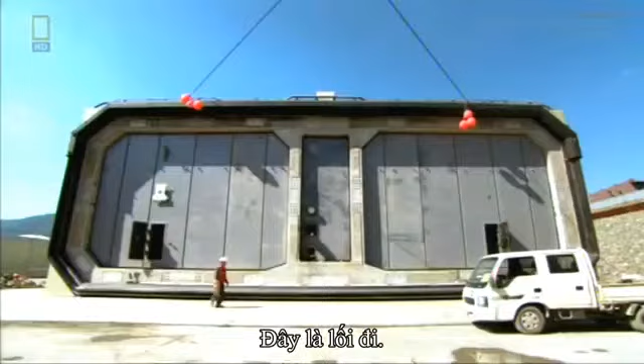Your next vacation may be spent in a paradise you've never heard of. You'll just need a way to get there. Here's the catch. That way has to go underwater. It would become the deepest immersed highway on Earth. Oh, they also have to build a couple of bridges. And did we mention the typhoons?

These tugs are towing a contradiction. A tunnel segment that's both colossal and fragile. Come back, close. Slow down. A raft of techno breakthroughs and untested results. Bound for a place few know, to entice the world to visit. And even sway the choice for the Olympic Games.

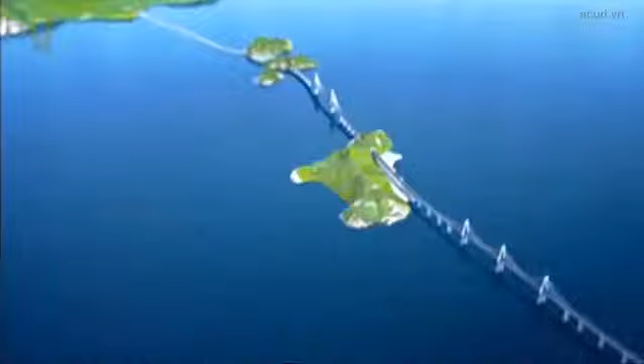The solution will slash travel time from nearly half a workday to 40 minutes and revolutionize life on both sides of the bay: the Busan-Geoje Fixed Link. A 4-lane highway that runs nearly 50 meters beneath the sea. Then it leaps across 2 colossal cable-stayed bridges. Altogether, longer than 80 football pitches. One of the biggest infrastructure projects in the world.

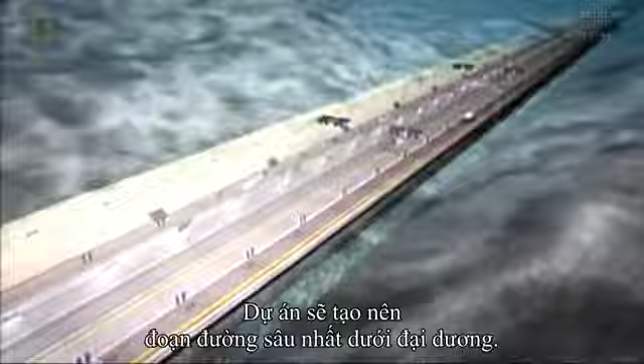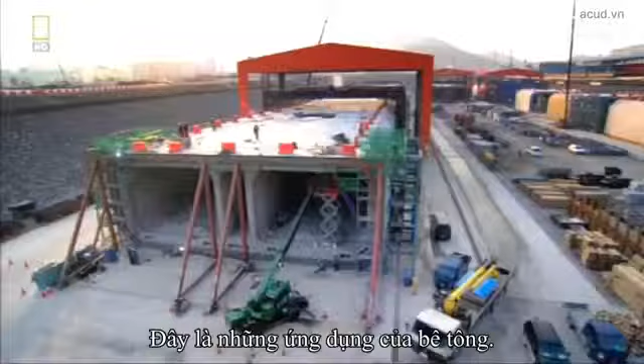Plunging 48 meters below sea level, the link will boast the deepest immersed roadway in the world. The tunnel will be composed of 18 mammoth segments, each as long as 2 football pitches and as heavy as an aircraft carrier. Wide enough to carry 2 lanes of traffic each way, with an access tunnel between. That's the concrete reality. Now, here's where it gets dicey.

Each segment has to be carefully towed into position, then carefully sunk to the seabed. And all the segments have to align within 35 millimeters, less than a thumb's width. Weather adds its own demands. This site is exposed to the open sea. There are always high waves, and the water is deep as well.

It is wide open to the Northwest Pacific Ocean, so we have extreme exposure conditions for the construction period. So we've got to be ready for whatever that sends us, like big swell waves, strong winds, and even occasional typhoon. Building a tunnel like none ever seen will take techniques like none ever tried. Yet the Koreans have never built an immersed tunnel. But this country has.

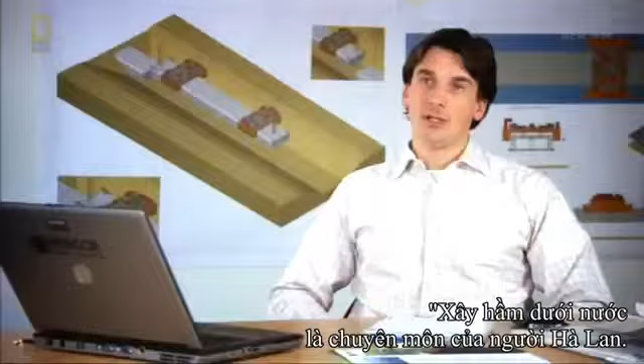The Dutch have 5 centuries of experience at holding back the sea. Het afzinken van tunnels? Tunnel immersion is actually a Dutch speciality. If you look at the number of immersed tunnels in the world, most of them are in the Netherlands.

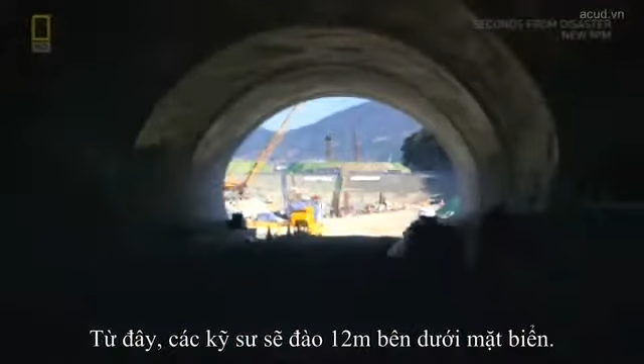Construction begins with the tunnel entrances. One on Gadeok Island, the other near an uninhabited island. From here, engineers will dig down to 12 meters below sea level to meet up with the undersea tunnel segments. But they won't tunnel through the seabed itself. If they did, the gradient would be too steep for driving. Instead, Peter's crew will lay prefabricated tunnel segments on the seabed.

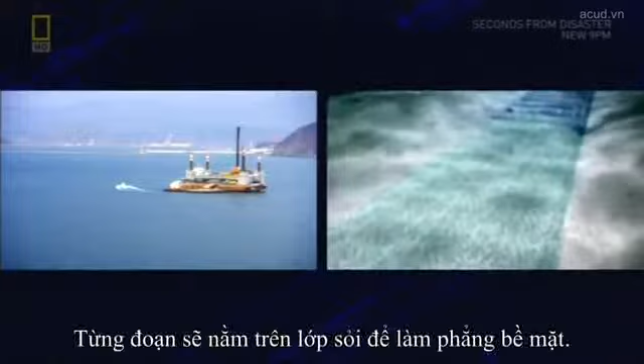First, engineers dredge a trench where the tunnel will rest. To buttress the foundation, they bore concrete columns into the seabed, stopping 3 meters shy of bedrock. The reason? Earthquakes. Avoiding bedrock will give the tunnel crucial flexibility. The segments will rest on a bed of gravel to ensure an even surface.

Because the bed determines the exact height of each tunnel segment, the gravel must be placed with pinpoint accuracy. Later, the entire tunnel will be covered with thousands of tons of crushed rocks to protect it from collisions with ships or anchors.

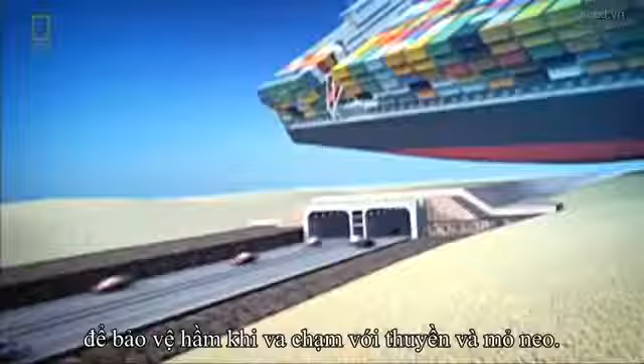Because the tunnel segments will be prefabricated, the first challenge is finding land for a construction yard. Not an easy task in Busan. If you look around, there's not a single metre of flat land anywhere that a contractor can use as a base for the construction period. From the tunnel site, the closest spot lies 35 kilometres away. It's big enough to build up to 5 tunnel segments at a time.

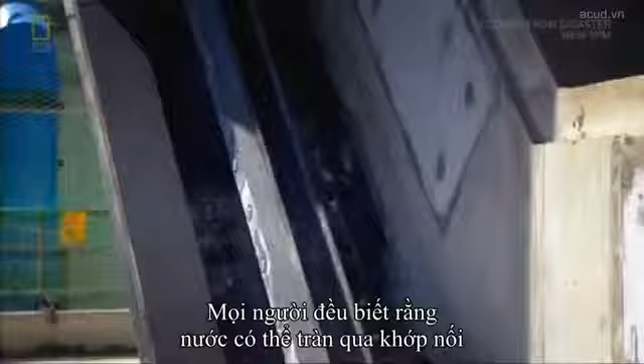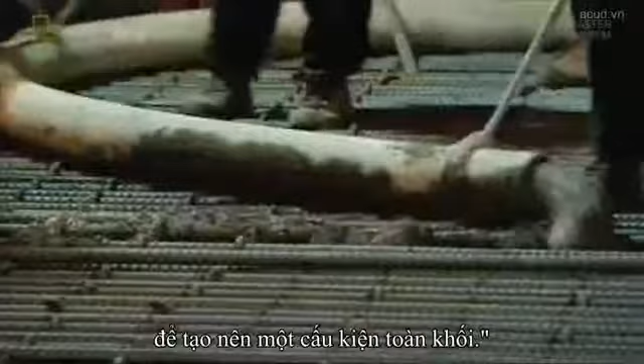Each segment weighs about 48,000 tonnes and is made of 8 subsections, each twice as long as a London bus. Anyone with a basement knows water can penetrate concrete joints, potentially disastrous in an underwater tunnel. But each giant section is cast without a single joint, thanks to Korean ingenuity. We continuously poured full sections from the ground up to the top of the walls to eliminate gaps in the walls. A process lasting 24 hours.

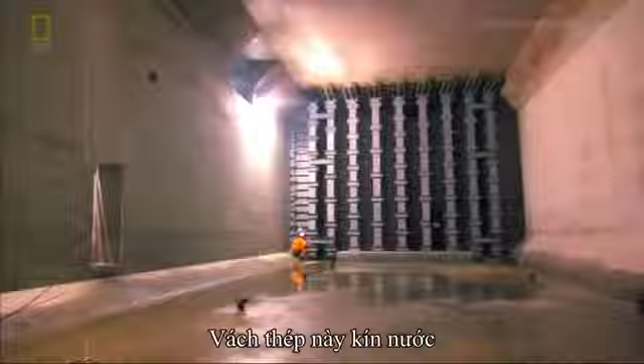After casting, the ends are sealed with steel bulkheads, a Dutch innovation best appreciated later on the bottom of Jinhae Bay. The bulkheads are watertight because these babies are about to take a bath. Flooding the dry dock will allow them to float the segments out to sea. The inundation of the dock takes approximately 48 hours.

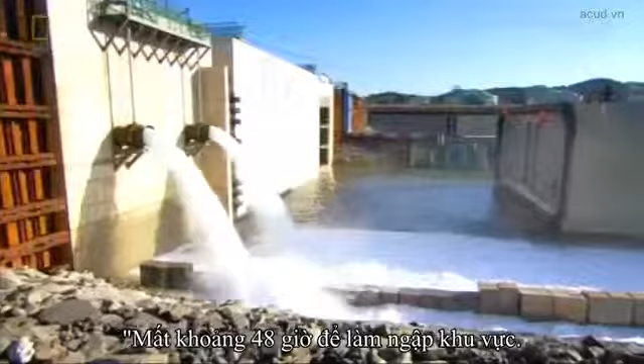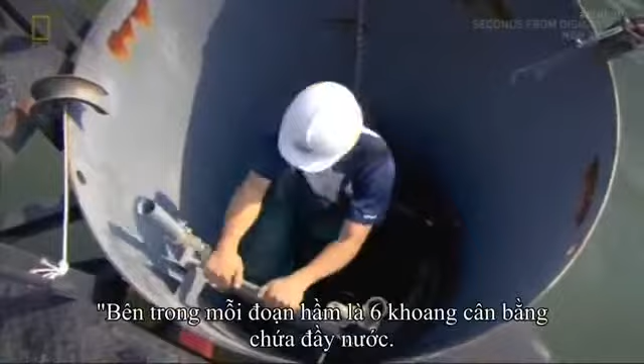During the first phase, we let in water until it reaches the level of the bulkhead door. Then we'll check to see if the bulkheads are leaking. Once all the leaks are repaired, or if there are no leaks, we'll fill up the dock completely. It's enough water to fill 230 Olympic pools. So how do you prep 48,000 tons of dead weight to float? Inside every tunnel segment, there are 6 ballast tanks, and they're filled with water.

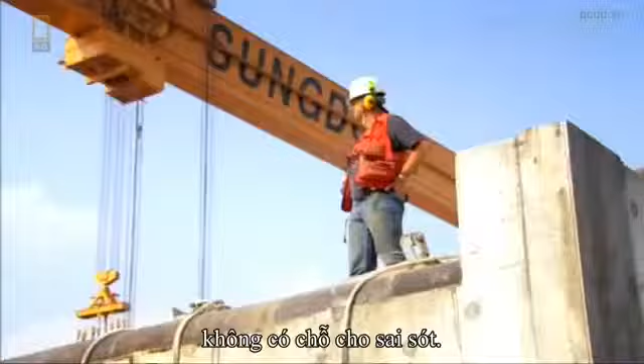Believe it or not, clearing the dry dock was the easy part. While work continues on the undersea tunnel, the rest of the Busan-Geoje fixed link starts to rise. 2 giant bridges. One with 3 pylons, the other with 2.

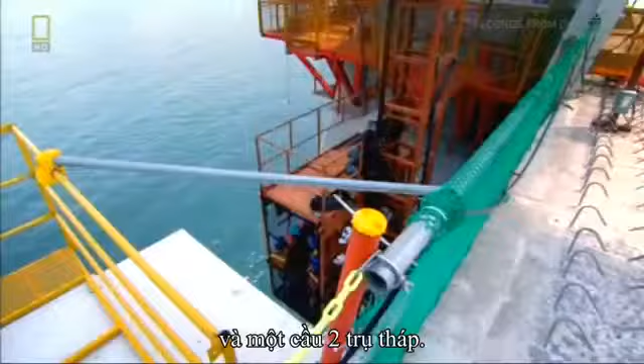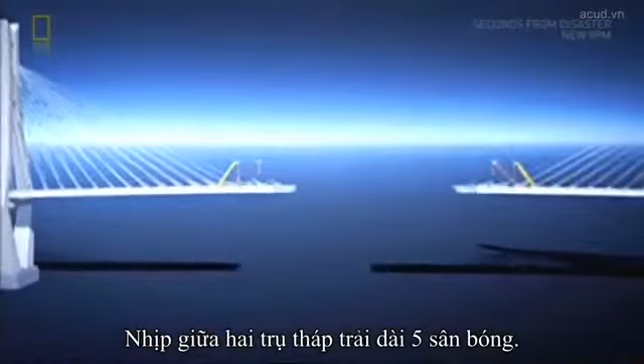At its topmost, the 2-pylon bridge will soar 156 meters above sea level, the height of a 50-story building. The span between the pylons will stretch the length of 5 football pitches, with enough room for the tallest freighters to pass under. Crucial for a city that thrives on shipping for its livelihood.

The most pleasing aspect of the bridge is also the most daunting. Its curved diamond shape. Of course, curved pylons are very difficult to construct, but they're very much in harmony with the surrounding scenery in many ways, in that they bear resemblance to a mother's praying hands and to the wings of seagulls.

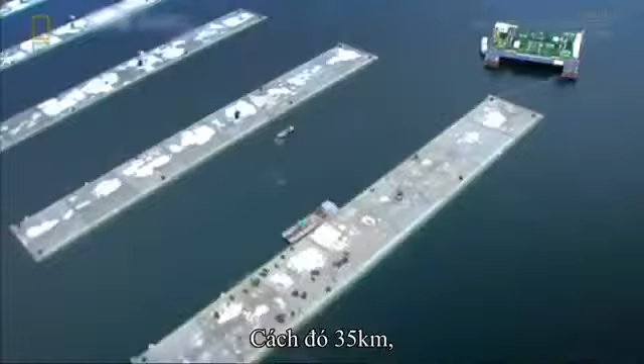35 kilometers away, the first 5 tunnel segments arrive at a temporary mooring site. From here, they'll travel across Jinhae Bay to their resting place on the sea floor, already leveled and lined with gravel. And here's how they'll get there. Pontoons the size of a mansion. Dutch designed, Korean made. One pontoon is positioned near each end of the tunnel segment. After arrival at the tunnel site, mammoth winches on pontoons will lower the segment to the seabed. At least, that's the theory, because it's never been done in the open sea.

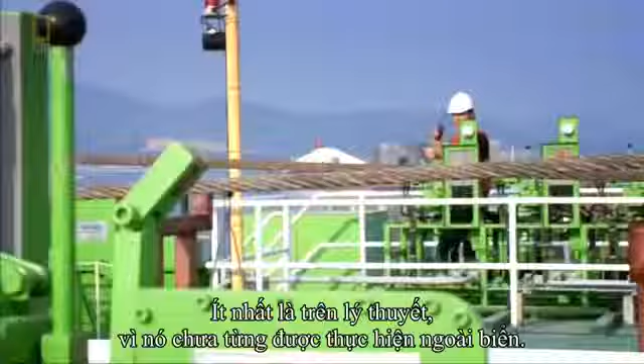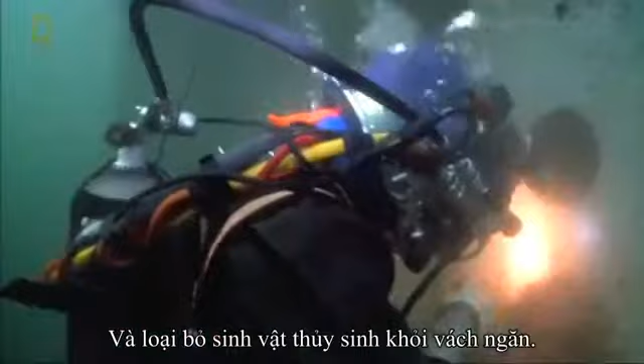A specialist diving team prepares the first tunnel segment for the immersion operation. Divers test connections for data systems and power supplies. Standing by. And remove marine growth from the bulkhead. Down on the wire, please, Steve. Down on the wire. Finally, they install steel wires underneath the tunnel segment, crucial for positioning during immersion. In a good position now, we can come up on the wire. Coming up on the wire.

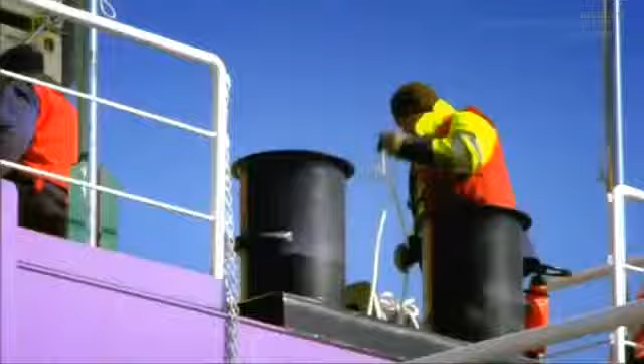Above water, the crew are also adding a temporary access tower, so workers can enter the segment in case of trouble with the ballast tanks. Over, the tunnel is clear. Every problem has to be anticipated, because if things go south, they won't get a second chance. What we do doesn't have anything to do with luck. We know what's involved, we know how the process works, and we have the feeling we control the whole process. Not quite.

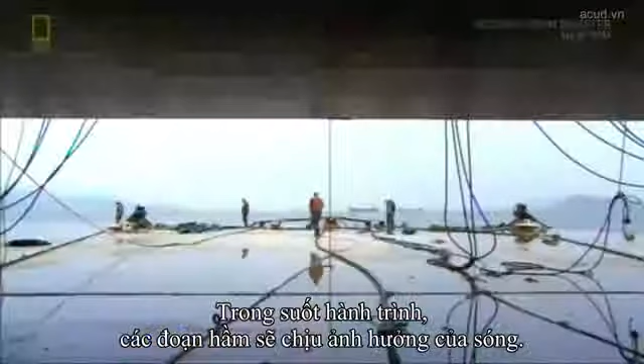Back in Holland, the rest of the immersion team stands by to fly out. In all, 56 men wait for Peter to say go, and he's waiting for a forecast. When the wind blows from the south, swells roll in from the Pacific. Because we're situated offshore, we have to deal with waves. And these waves can be pretty fierce. Even swells barely 30 centimeters high pack so much force they could fracture the subsections that form the tunnel segment. Throughout its journey, the segment will be at the mercy of the waves, so the team needs 3 days of calm seas.

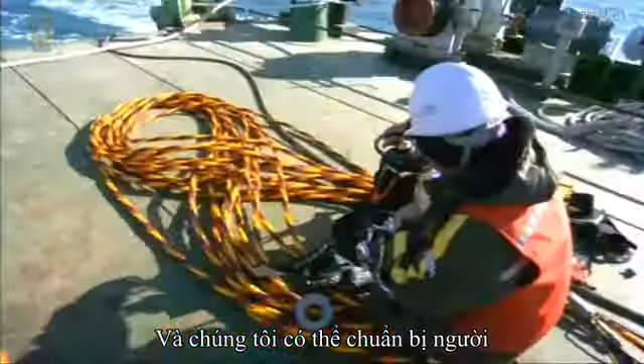Strukton looked around for a forecaster, but few dared to stick out their neck for such a costly guess. Then, a Danish company seized the challenge. They came up with a model to predict waves as small as 10 centimeters, up to 5 days out. A stunning breakthrough in forecasting. That means we're able to say, tomorrow we can do an immersion. And that means we're able to put people on the plane yesterday, really on a last-minute basis. It takes away a big risk for us and for our client.

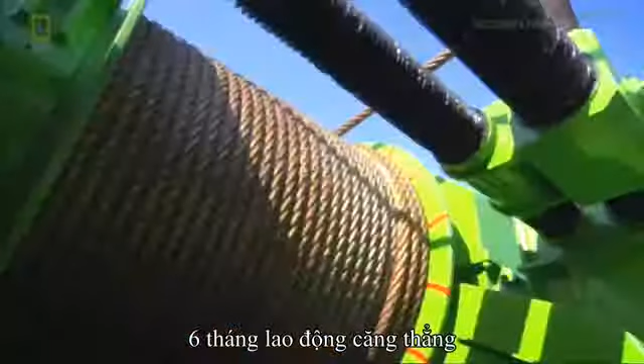We've got the weather. They're all showing the same prediction. The swell still not as bad. I would say we have a go. Green light. We'll try. No more try, right? Okay, thank you. Yes, bye-bye. Ahead lie 48 hours of tension for the boss. Six months of work rides on steel threads and a forecaster's guess. Tonight, no one will sleep soundly.

After a cautious voyage at 3 kilometers an hour, the first tunnel segment arrives at Gadeok Island, the starting point of the tunnel. Joining Peter is the elite team fresh from Holland, among the few men on the planet who can do this job.

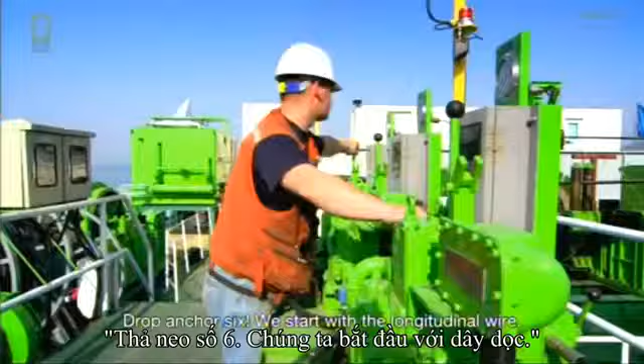But working along shore poses a huge challenge. 48,000 tons have to be maneuvered into a slot with just 1 meter of clearance underwater on each side. One false move and the segment could get jammed in the rocks. Controlling the segment are 14 steel cables, anchored in the rocks and on the seabed. Aligning the segment takes painstaking accuracy. Surveyors take readings using a system of prisms and mirrors mounted on the access shaft and the survey tower. It's all new to the Koreans, so it takes time getting used to the technology.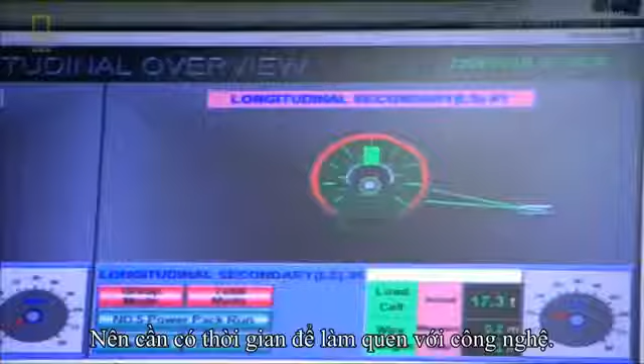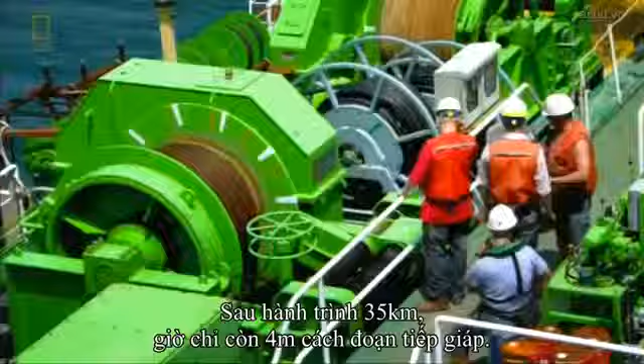The ordeal will take all day and end either with an engineering triumph or a 48,000-ton disaster. With so little clearance and so much at stake, the segment moves at a snail's pace. After a journey of 35 kilometers, it's now just 4 meters from the abutment.

We've worked really hard for a half a year to prepare for this moment. 56 of our people are here to execute this operation. The Koreans are excited and tense because they've never witnessed this. We've done it more often, but still, a very special moment.

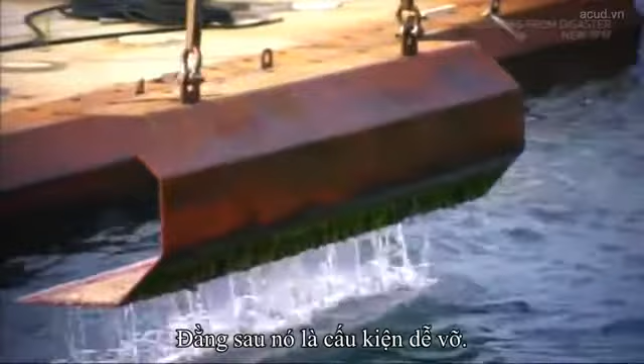Till now, steel plates have protected the leading edge of the segment. Easy down. Behind them is a component as crucial as it is fragile: a rubber gasket to ensure a watertight connection with the abutment. Now they're ready to begin the descent. Operated by remote control, the ballast tanks slowly fill. The command post monitors everything via remote control cameras, on the pontoons and inside the tunnel segment.

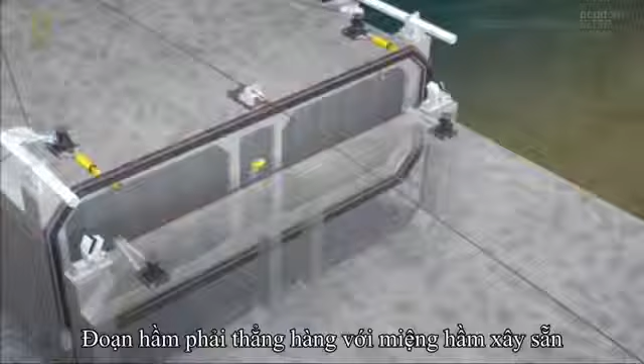The segment must align with the mouth of the tunnel to within 3.5 centimeters. You can imagine that if this segment were placed 10 centimeters off and you did that 18 times, you'd end up 2 meters off on the other side. Well, that wouldn't be very good.

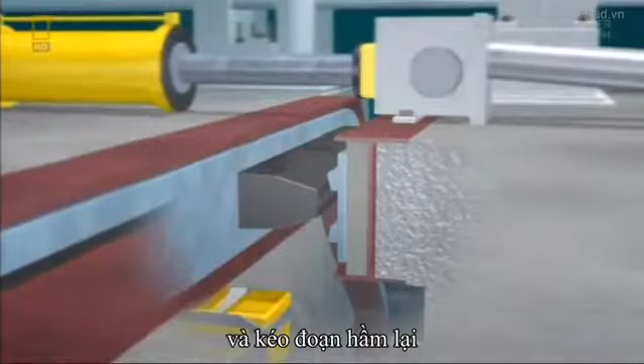7 hours later, touchdown. The segment now rests just 50 centimeters from the abutment, the mouth of the landward tunnel. To close the gap, engineers have installed a pair of powerful hydraulic jacks. Linking the jacks and applying tension closes the gap. The final stage begins from the landward side.

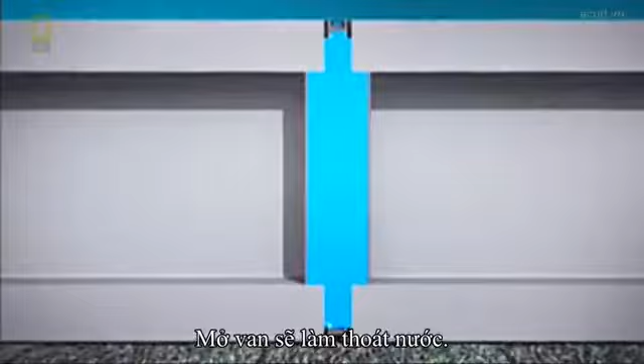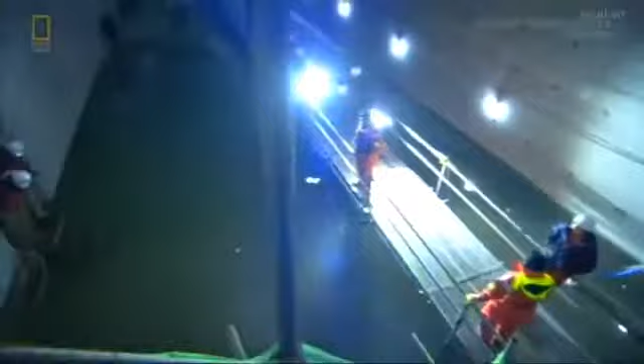A wall of water nearly 3 meters wide separates the segment from the abutment, what they call the immersion joint. Opening this valve will force the water out. As the immersion joint empties, external pressure will further compress the gasket for a watertight seal. The echo from the bulkhead reveals the water level in the joint. With the water drained, they can open the bulkhead door.

But the lock's jammed. You knew that it was going to break? Huh? Did you know that? Because you took the toolbox with you.

This calls for cruder technology. All that stands between the crew and the first immersed segment is the steel wall installed back at the dock. And here is why it's so brilliantly simple. On other tunnels, engineers seal the ends of segments with concrete, then knock it out after immersion. But that takes time and creates debris.

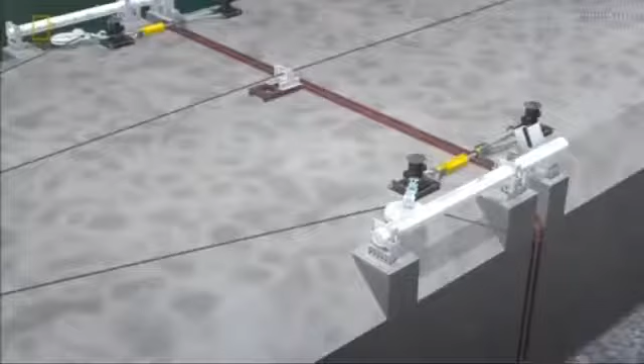The modular steel bulkheads are easy to install, easy to remove, and they'll be reused on every segment and eventually recycled. Faster, cheaper and safer. An engineering trifecta. Finally, open sesame.

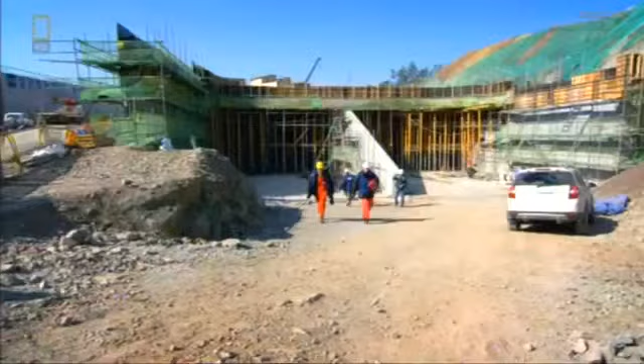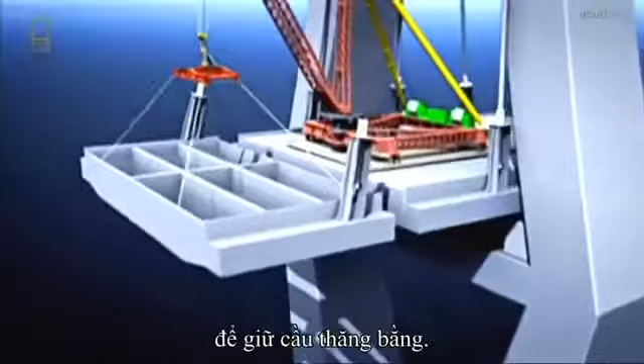Like the Busan Tunnel, the bridges advance in segments, but 2 at a time, not one. It's called balanced cantilever construction. Working outward, steel segments are laid on each side of the pylon to keep the bridge in balance. Then 2 cables are attached to brace the segments.

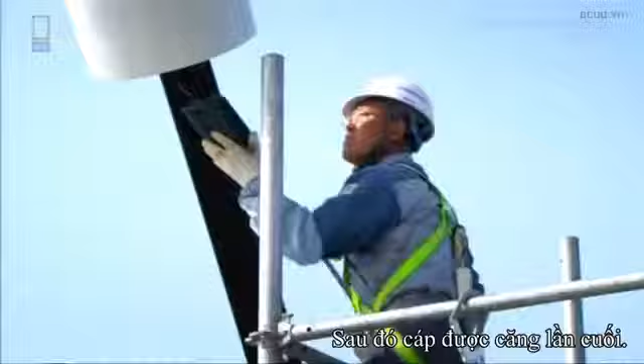Once they've done that, the derrick crane then lifts up 6 precast concrete panels and places them onto the steel frame. Then put a final post-tensioning into the cables. And we're ready then to start the whole thing over again.

Back at the tunnel, the team have installed 12 concrete segments. But now they're heading for 48 meters, the deepest water and the hardest challenge.

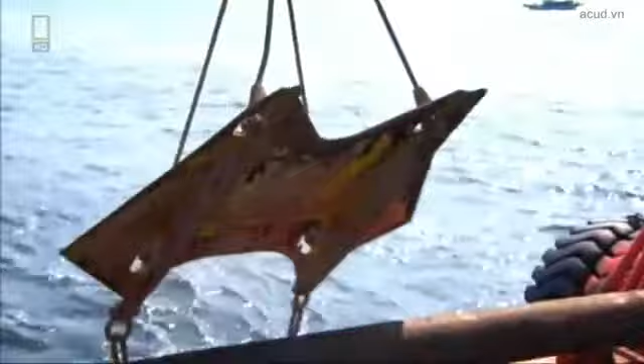New hurdles demand new techniques. The sea floor out here is soft clay, so they need to set anchors that can hold the segment and pontoons fast. Stevmantas, named for their fish-like shape. They're designed to dig in where other anchors lose their grip. Once segment 13 arrives here, 14 steel cables connected to the anchors will hold it in position.

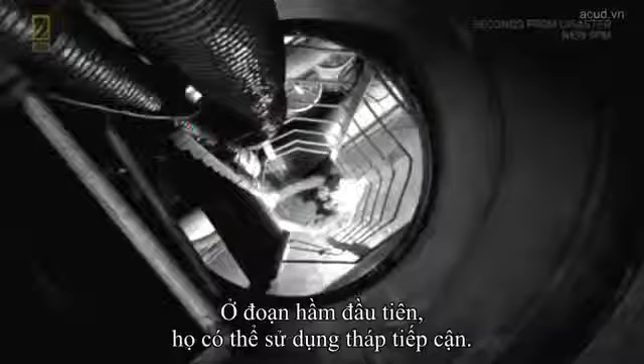But once again, deep water raises the stakes. Once the segment hits the bottom, suppose a problem arises with the ballast tanks. Somehow, Peter would need to get the engineers inside. On segment 1, they could use an access tower, but not in deep water. The solution is a first in tunnel immersion, a self-propelled diving bell. Purchased in America, the sub was refitted just for this project.

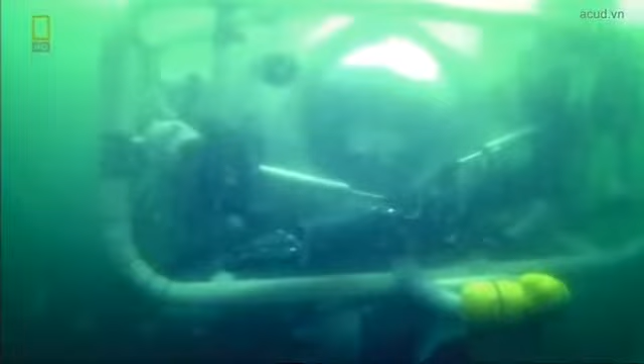We're coming down to 15 meters, see if we can get the tunnel on sonar. This is the tunnel element here. That's probably a bollard on the corner.

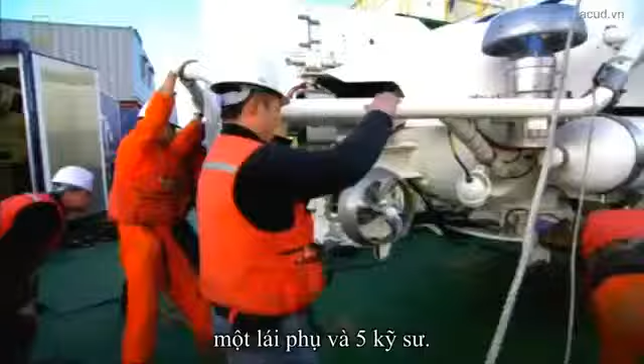With a little boat like this that can go to 300 meters, you've got the concept of a ferry transferring people to the tunnel segment. It's 9 meters long, with room for a pilot, co-pilot, and 5 engineers. It can dock on a landing tower on the segment for watertight access to the tunnel.

Deep water poses another problem. Monitoring the position of the segment as it's lowered, because one misalignment would be disastrous. To calibrate the position of the first segment, surveyors took readings from prisms mounted on the access tower. But remember, there's no access tower here. So once more, the Dutch devise a smart, simple solution. It's named for what it is.

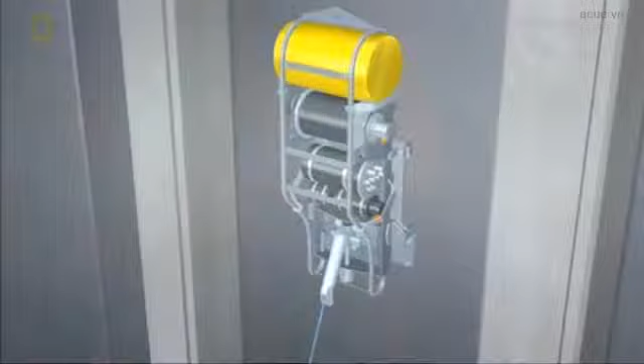A taut wire. One end attaches to the leading edge of the segment to be immersed. The other end attaches to the previous segment. The taut wire ensures the connection stays under high tension. Positioning the device is a delicate operation. This custom-made model is the only one in existence. Breaking it is not an option.

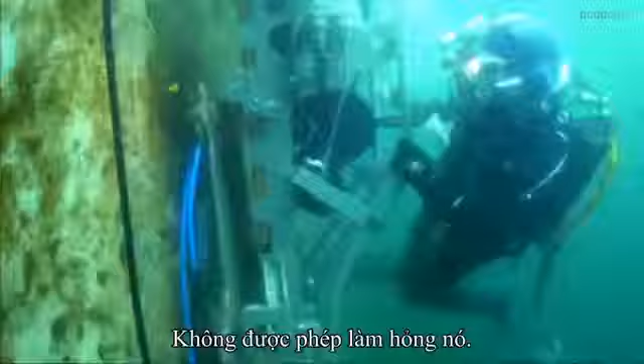When this segment descends, a computer will record the length and angle of the wire, allowing the team to monitor the segment's position. The taut wire is now under high tension between this segment and the previous one. And as the segment descends, the wire automatically retracts and becomes shorter. So that provides us with exact positioning data.

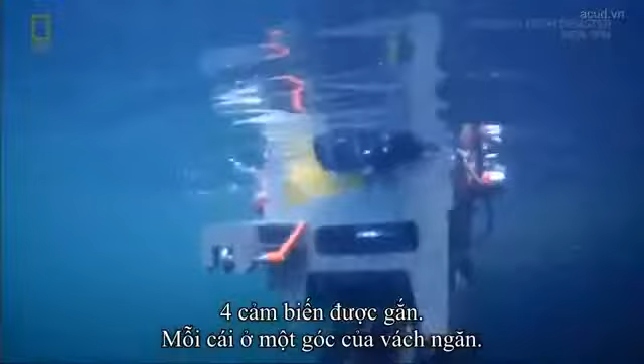To fine-tune the position of the segment on the seabed, 4 of these sensors are attached, one on each corner of the bulkhead. Another custom innovation for this project. And wait till you see how accurate they are. The whole operation is remote controlled from the command unit on the pontoon. With one click, they start filling the ballast tanks.

You can feel the tension building up now. And then we all have one question. Can we do it again? Can we get it in position? It's the same tunnel, but it's farther away from the coast. It's deeper, the weather, everything. So many aspects make it different every time, so you have to stay alert.

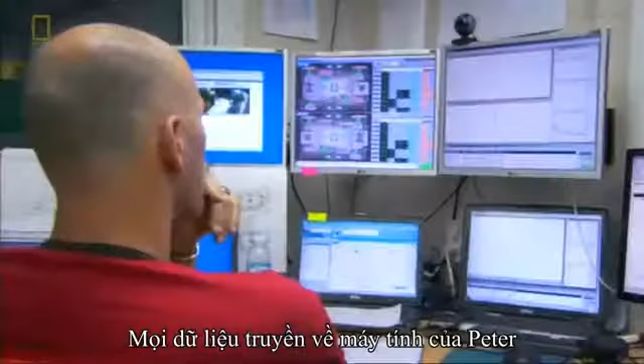All the data feeds into Peter's computer and refreshes the position of the segment every second. This is the tunnel where we have to go to. The green one is the final position, and this is where it is now. So you can see it's just below sea level.

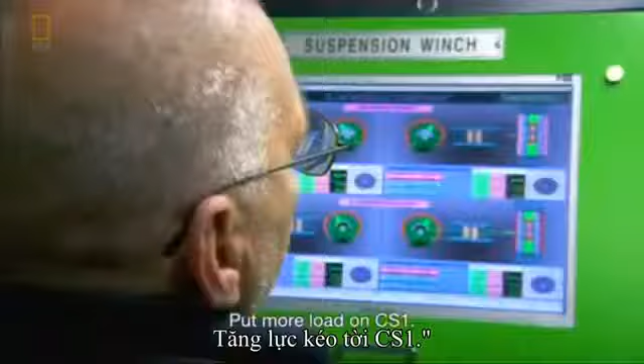Data from the winches allows him to adjust the segment during descent. It all happens like walking downstairs. One step forward, one step down. And the deeper it goes, the more careful the steps.

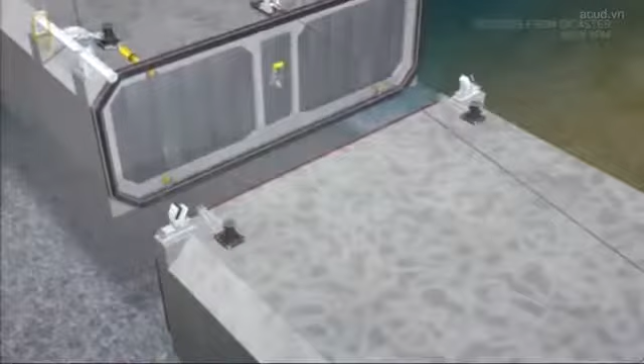The first step in joining the segments poses another challenge and another solution. The moment a tunnel segment approaches the one ahead of it, it's moving because of the swell. So we install 2 guide beams on the top end of the segment. Another simple but elegant solution. The moment we pull them closer together, the guide beams become less flexible. The movement diminishes until the segment is motionless.

With only 50 centimeters separating the segments, and in near zero visibility, a diver connects the hydraulic jacks. The segments seem aligned, yet the slightest error on this end will translate into a big mistake at the other. But the Dutch don't miss a trick.

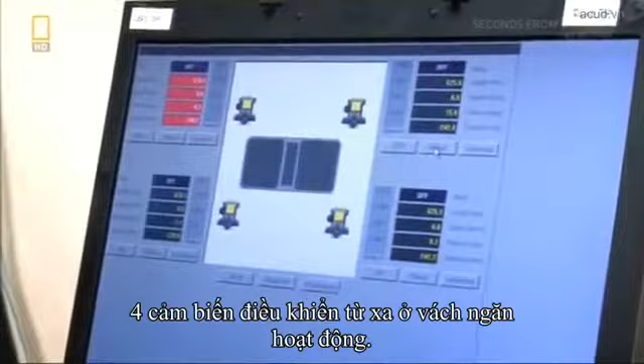The 4 remote-controlled sensors on the bulkhead now deploy. They measure the position of the segment within 1 millimeter, the width of a guitar string, and relay the data back to the command center. Peter needs to shift 48,000 tons of concrete, 20 centimeters to the right.

Even on calm days, the swell is so heavy and the segment is so long, stability is a problem. The solution? The External Positioning System, or EPS. Yet another Dutch invention based on a simple idea. A pair of hydraulic legs and extendable feet to hold, lift and move the segment.

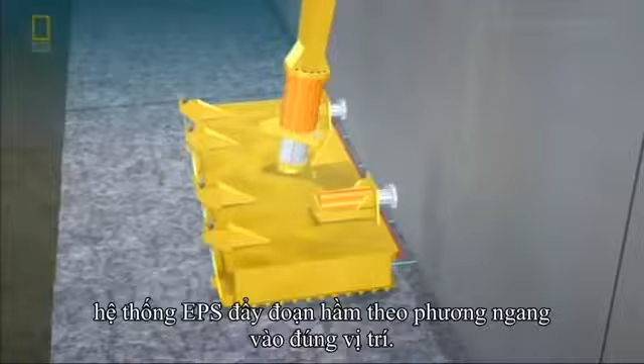Connecting each pair of legs are 4 steel cables, already installed back at the mooring site. Braced on its robot legs, the EPS laterally aligns the segment into its correct position. Now, the jacks are tightened by remote control, compressing the rubber gasket.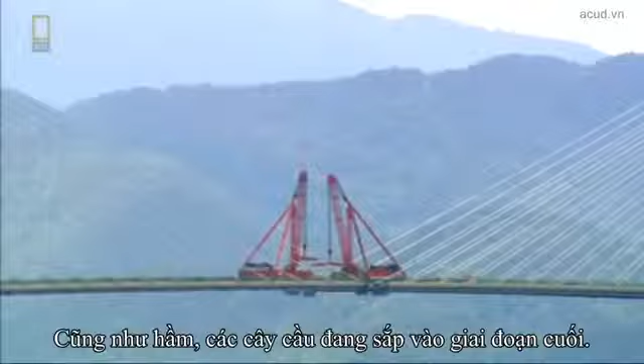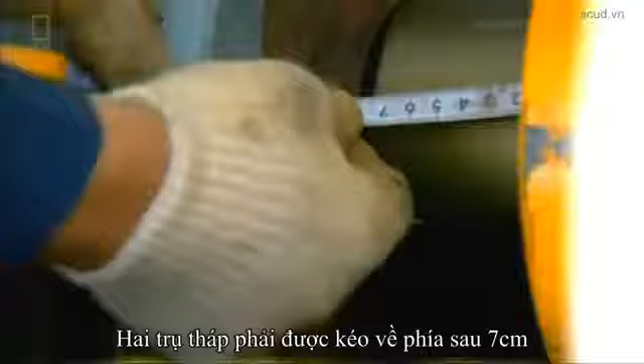Done. 1 more segment complete. Like the tunnel, the bridges approach the final stages. Before the 2-pylon bridge can accept its last section, engineers have to perform a stretching exercise, as tiny as it is powerful. Both pylons have to be pulled back about 7 centimeters to create enough space for the key section to be placed. Once the tension is released, the final section will have a tight fit.

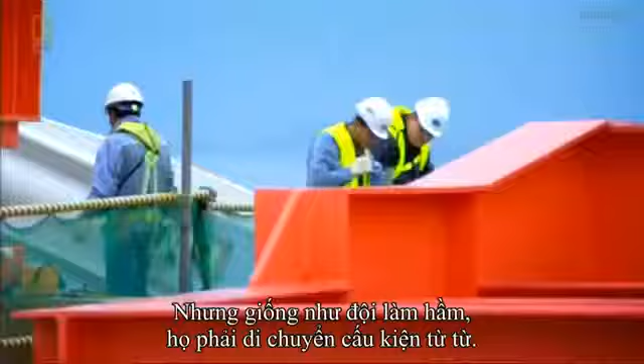After 6 years, they must be eager to finish. But just like the tunnel crew, they have to move in baby steps. Because this baby is a giant. A few kilometers away, Peter's crew prepares to install their last segment. Just like the first segment, number 18 has to be maneuvered between rocks. As before, they run some of the anchor lines from the pontoons to the rocks.

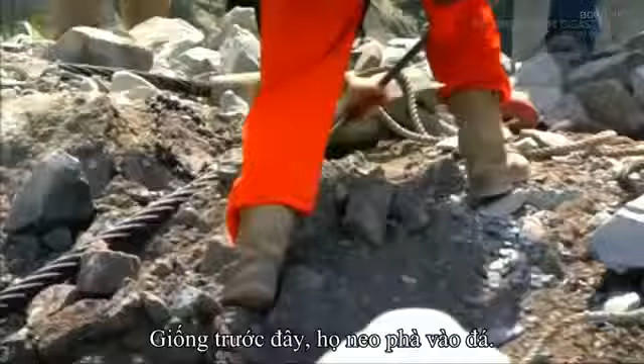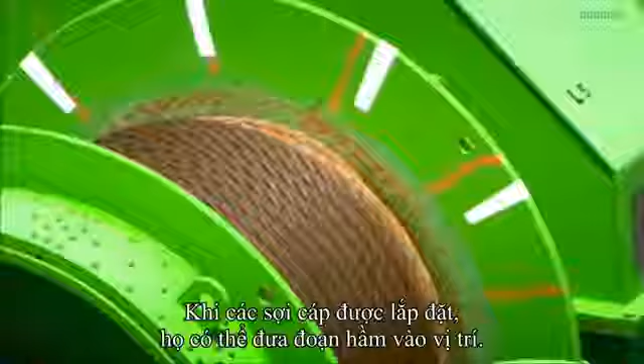Because it's so close to the island, it's very difficult to install the immersion wires. Connecting them isn't easy by any means. It's not just a matter of simply pulling them in place. With all cables attached, they can start maneuvering the segment into place. Because this segment is extremely heavy, we can't afford even a small mistake. Light contact can cause huge damage to the segment, and that kind of damage can set back the entire project. After 3 years, they'll open the last tunnel segment tonight, if all goes well.

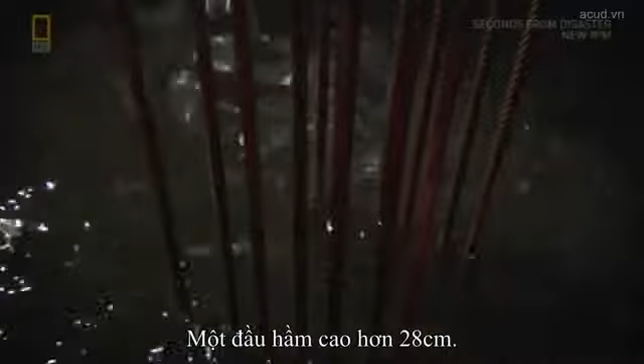The segment hits the bottom, but there's trouble. One end is sitting 28 centimeters too high. We're now trying to figure out what the cause is. We don't know yet. It's a major problem at the moment. We're taking about half an hour to go through all the steps so that we don't miss anything, Yves. And then I'll inform you about the situation. The gravel foundation under one of the EPS feet is overbuilt, so they'll have to remove the foot. And the grand opening will have to wait one more day.

After final adjustments, the last tunnel segment now sits squarely on the sea floor. All that's left is entering the tunnel to seal the joint with the final segment. They'll enter via the tunnel entrance on Gadeok Island. It's the last time Peter will make this trip.

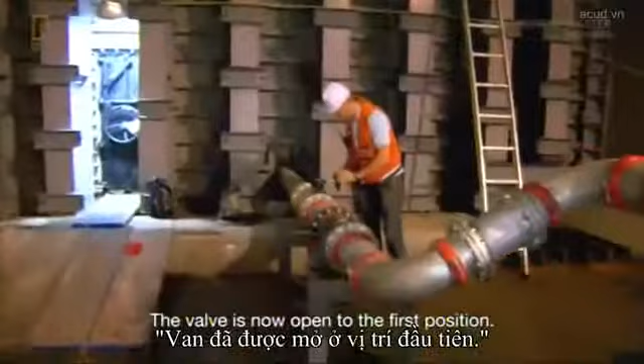The last step is pumping water out of the immersion joint, so the segment can close up for a tight seal.

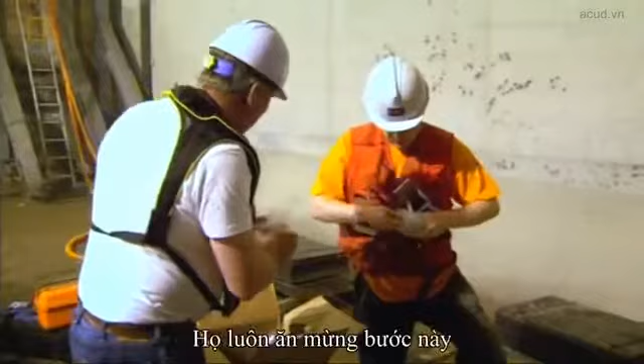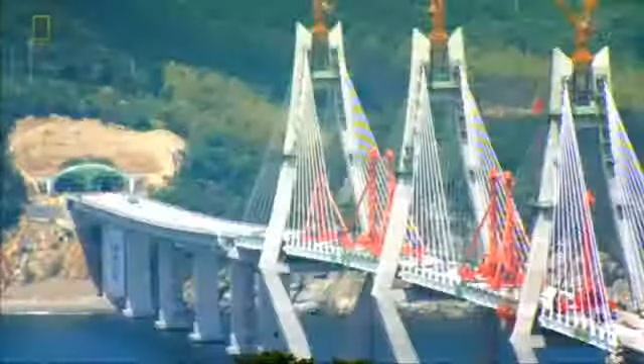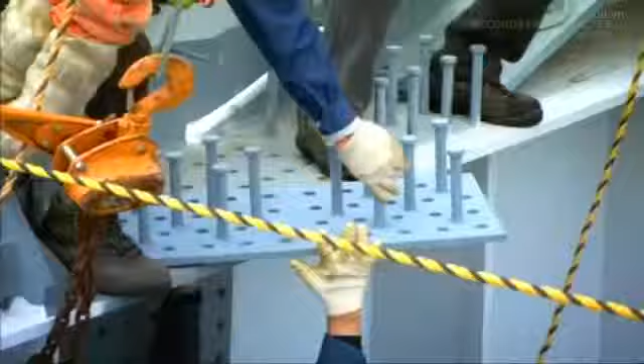They always celebrate this step, but today is the grand finale. Once complete strangers, now firm friends, and soon to go their own way. The end of their long journey lies behind this bulkhead door, and the honor of opening it falls to Peter. Back at the bridge, the final section is lifted into place. Once the tension on the towers is released, the whole structure will be locked in place. With the bridge complete, all that remains is opening the final segment of the tunnel.

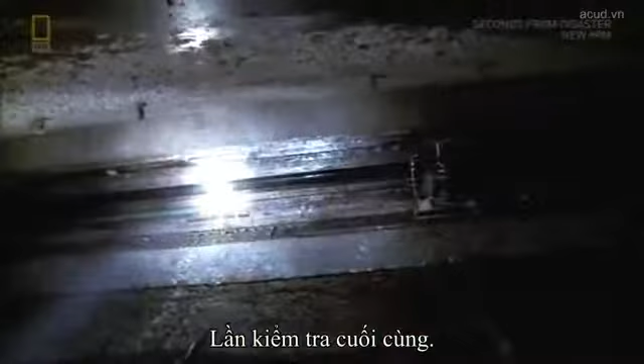Last inspection. Really extremely proud that we did it, and happy, of course. Happy for the whole team. It's just great. After all this time and after a difficult operation, we did it. Very emotional, yes. Fits the moment. And proud. So proud. Yeah. Come back.

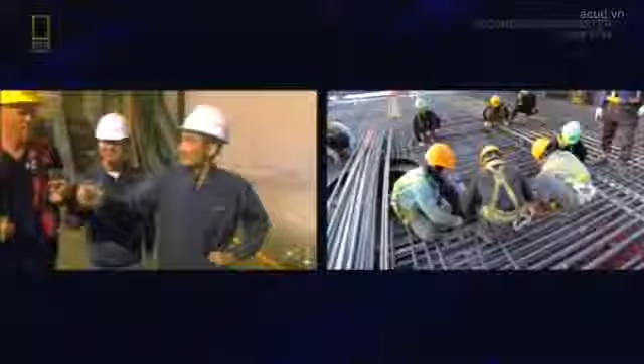For Peter's team, the tunnel marks another success on a stellar resume. For the Koreans, it's a chance to join the Dutch on the world stage. Actually, this was the first immersed tunnel project in Korea. And we developed lots of new equipment, and we trained lots of engineers, and eventually we could finish in time, and everything is happy. This isn't just a shortcut to an island. It's a path to the future. And who knows where that leads.